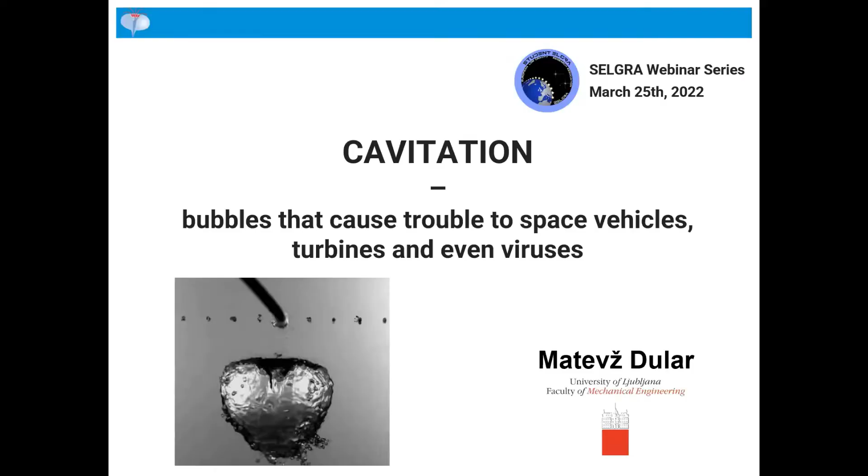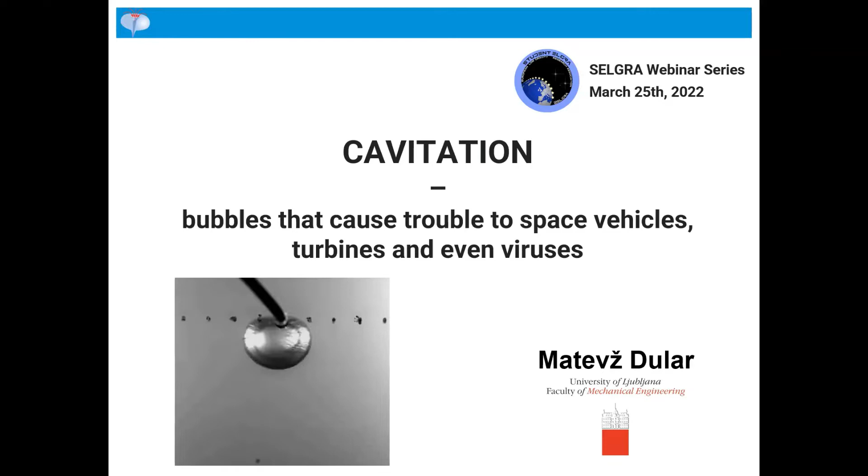Today I'll talk mostly about cavitation, and that's bubbles basically, which have some relation to space science and engineering, as you will see, but also other stuff. It won't be directly related to microgravity research, although some of the experiments that I will show were actually done in microgravity. So hopefully this will be also interesting for you.

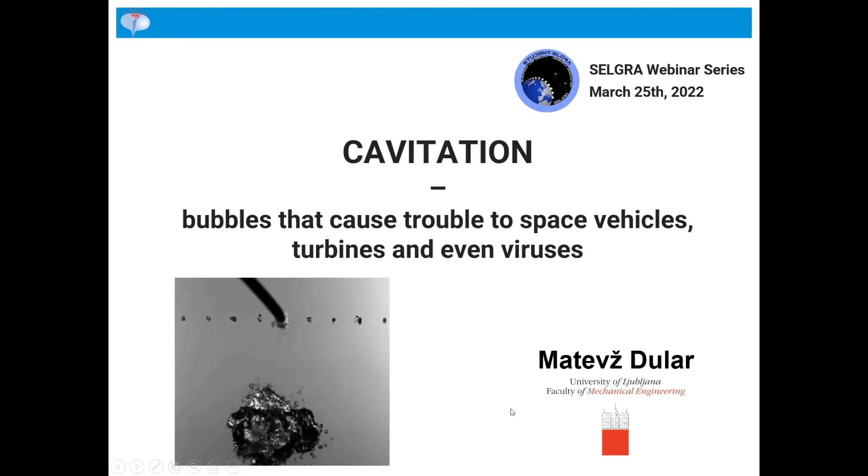So what's cavitation? Let's start with this. Cavitation is basically something very similar to boiling. Everybody knows that you can boil water if you increase its temperature. If you increase the temperature from, let's say, 20 degrees at 1 bar normal pressure, and increase this temperature to 100 degrees, the water will boil. You will get vapor, right? But there is a second way how to get to vapor, and this is if you leave the temperature the way it is.

Let's say 20 degrees, but you decrease the pressure down to about 2000 pascals. So it's a very, very low pressure. And essentially the same thing will happen.

This you can also see in these two movies. The one above, this is normal boiling at 100 degrees Celsius and normal pressure. And the one below, this is cavitation. But you can see I can hold this flask in my hand because it's not hot, it's 20 degrees, but I vacuumed air out. So you have very, very low pressure inside here, and you have bubbles boiling. It looks like boiling, but it's called cavitation.

So what's so special about cavitation? What is special is that it happens very, very quickly. This is a nice experiment, which I don't recommend doing at home. You take a bottle and you drink the beer first, and then you fill it up almost to the top with water, and after that you hit the neck of the bottle, and if you hit it hard enough, the bottle's bottom will fall off. So it doesn't seem very special to break a bottle, but once you look at this at a very high speed recording.

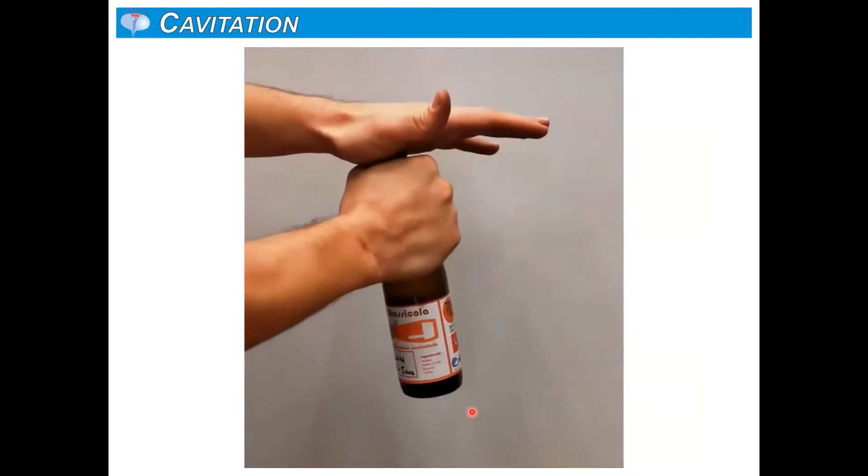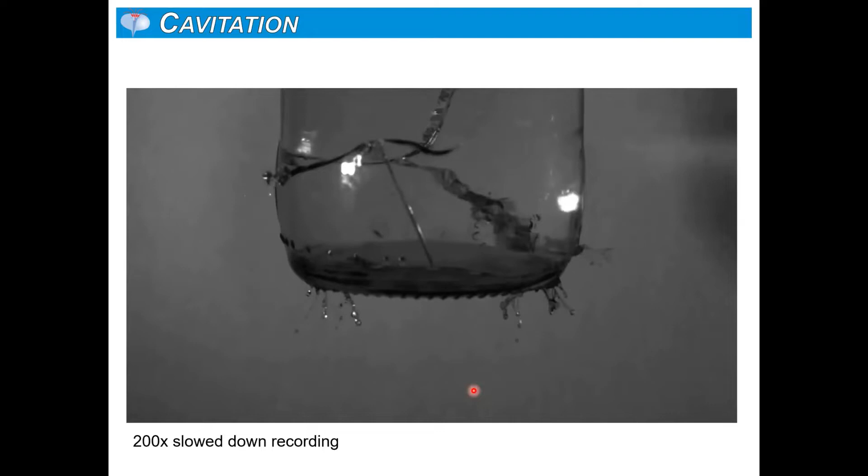This is now 200 times slowed down. The bottom of this flask, you can see bubbles appeared and they disappeared, and at that moment when they disappear, the bottle breaks. So what's interesting here is that when we hit the bottle, we create a shock wave, and as it reflects at the bottom of the bottle, you get a negative pressure. The pressure goes below this 2,300 something pascals. You get bubbles, and when the pressure recuperates to a higher pressure, the bubbles disappear, they implode, we call it. And this implosion basically is so violent that the bottle cannot stand it and it breaks. And this happens really, really fast.

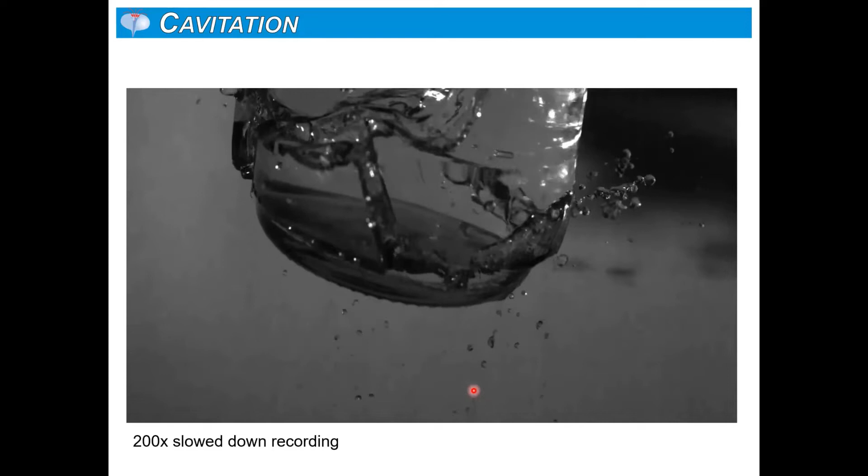So we can go even one step further to check out what is going on in more detail. These are the experiments that I've mentioned before, done in zero-G. This was done actually in Switzerland at EPFL by Outi Supponen, and she's now actually at ETH as a professor. What they wanted to do is make a very, very spherical bubble. It's very hard to make a bubble which is almost perfect. And to make it perfect, you need to take away all the disturbances, such as walls and free surfaces and so on, and one of the disturbances is also gravity. So that's why they decided to go into the airplane and fly the parabolas and do the experiments there.

So what we're looking at now is, I think that's about 300,000 frames per second. So it's about 10,000 times slowed down normal recording. And you can see how the bubble grows. It grows, I think this one is about 3 millimeters in diameter. So it's a very, very small, tiny bubble, what we're seeing here.

So the growth itself is not that exciting, I would say. But what happens after it reaches this highest size, this is when things start to get violent, let's call it. So now the bubble starts to collapse, and you can see it, it's much faster phenomenon. It goes faster, faster, faster, faster, up to a point when even 300,000 frames per second is just not enough. So at that point, we need to speed our observation even more to about 10 million frames per second.

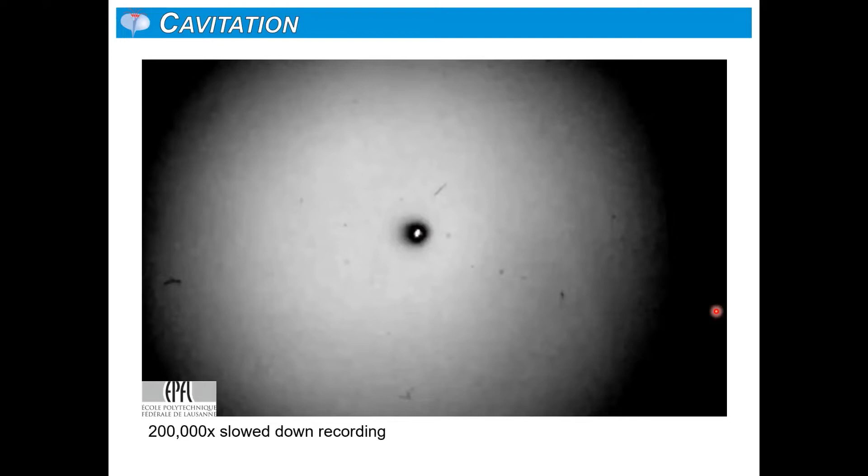So, through this light, you can calculate what was the pressure and the temperatures in there. So after that, what happens? We have a shock wave, a really beautiful spherical one, and this ring which you saw spreading around. This actually traveled at about 1,500 meters per second. So it's 5 times faster. The speed of sound in water is about 5 times faster than the speed of sound in air. So it's an enormous velocity that you can see.

And this shock wave, which travels around, this is the thing that basically destroys at the bottom that I've shown you before. So it's quite a violent phenomenon.

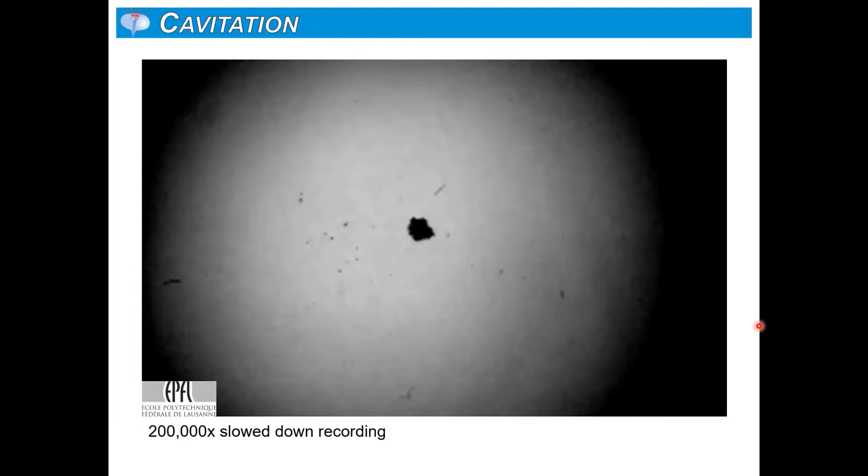So that was just one bubble. Now we're talking clouds of bubbles, many bubbles. And how do we get from one bubble, from a very clean experiment, to a dirty experiment with many bubbles which interact between each other and so on?

One way to do it is by the Bernoulli effect. The Bernoulli effect basically tells you that if you speed up the flow, locally the pressure will drop. And if the pressure drops a lot, again below this vapor pressure we call it here, water will cavitate, or any kind of liquid.

So if you want to do the experiment about the Bernoulli effect, the simplest one is just taking two sheets of paper and blowing in between them, and counterintuitively, the sheets of paper will move closer together. This is because the pressure between them gets lower. So the pressure outside basically squeezes the two sheets of paper together. That's the Bernoulli effect.

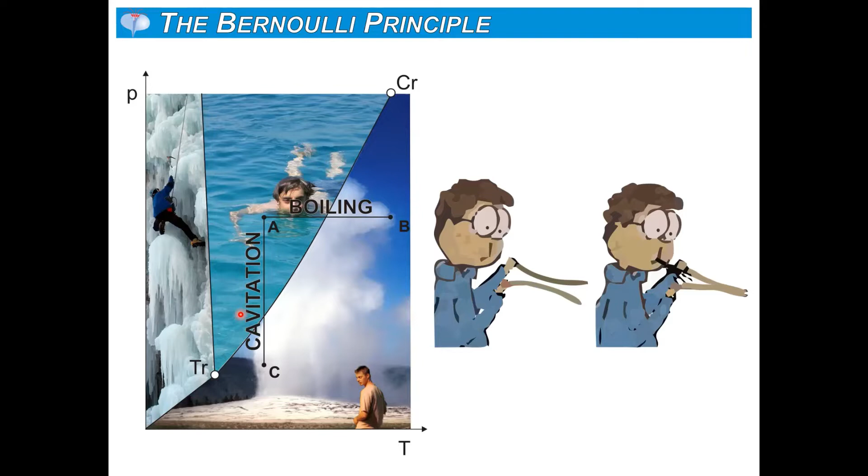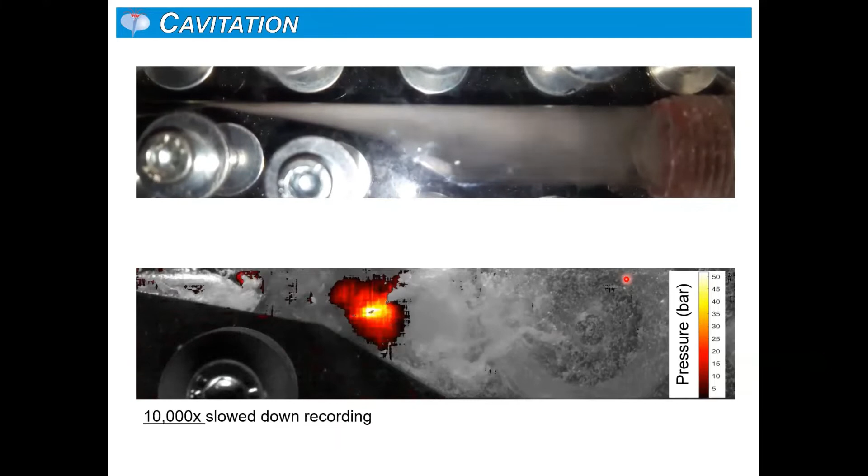And you can see, well, we call it a very rich dynamics. We have a sort of attached cavitation cloud, which then separates - this is a separate, it's many movies together. It separates, and these clouds collapse again. And when they collapse, you can see this red stuff that is also there.

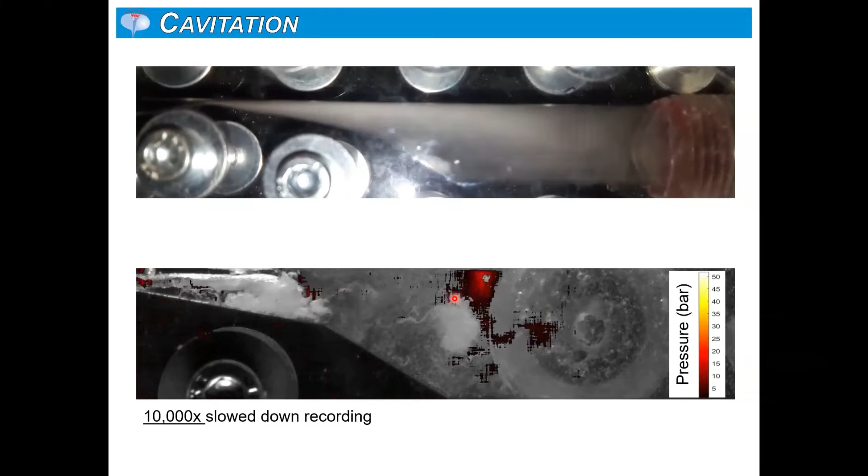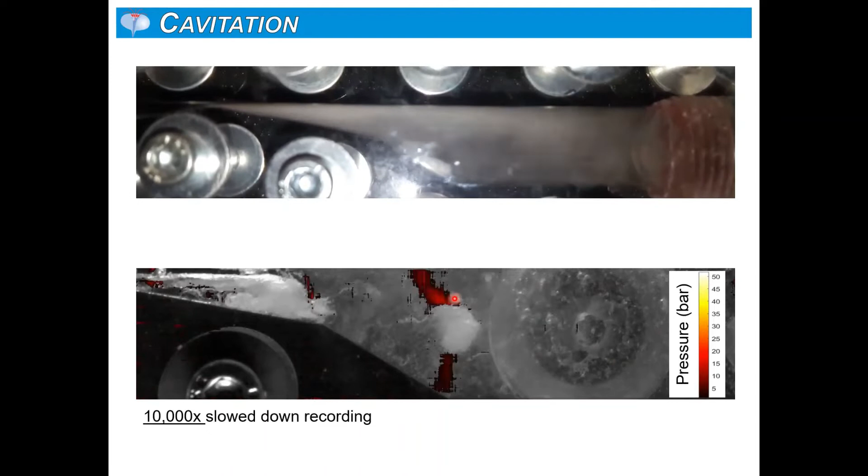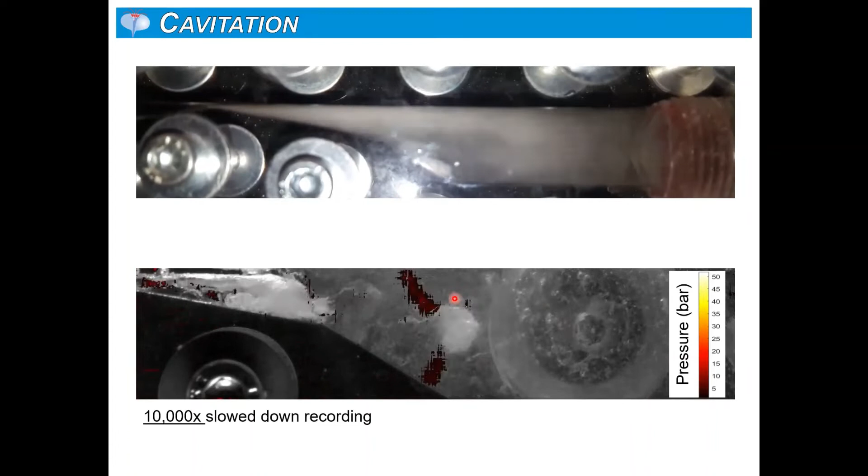These are actually the measurements of these shock waves that I was talking about before. They're not as nice as the one before, because here we're talking about clouds of bubbles, thousands of bubbles collapsing, not exactly at the same time, not exactly symmetrically, and so on. But these still have an amplitude of a couple, maybe 50 bars or so, and they can travel at the velocity of about 300 to 700 meters per second. So not quite the speed of sound in clean water, because you have so many bubbles in there, the speed of sound is a little bit slower, but it's still fast.

And how else do the bubbles look like? So, if you recall, I was talking about the Bernoulli effect before. For example, if you have a wing of an airplane, one of the effects of lift is that you have lower pressure on the upper side and higher pressure on the lower side of the plane. And this makes the plane basically fly.

And if you would put this kind of wing underwater and move it very rapidly, what would happen? Pressure on the upper side would get lower, and because of that, cavitation can appear.

Now, if you take this kind of wing and rotate it, what you get is a propeller. For example, a ship's propeller rotates, and on the side which has lower pressure, you will build up bubbles. These cavitation bubbles will appear and collapse, and they will cause all kinds of trouble.

So this would be a propeller, for example, and this one here is actually beside it - this is a water turbine. So you can have some kind of a cavitating rope of bubbles, let's call it.

These two bottom ones are maybe a little bit more exciting. This is the liquid oxygen pump of a Space Shuttle engine, one of the three main engines, and again you can see it cavitates. So this would be pumping oxygen into the rocket engine, and the conditions in there are so extreme that basically you cannot avoid cavitation.

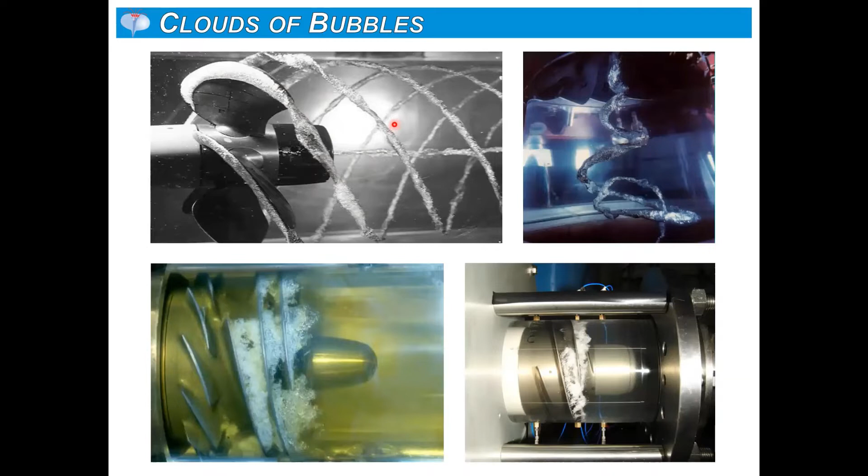Ships are a particularly funny thing, because cavitation on a ship's propeller is not that annoying. If I go back a slide, if this would be a ship's propeller, you would see that bubbles are created on the propeller, and then they flow downstream. Downstream you'll have the rudder of the ship, and on the rudder the pressure is a little bit higher, so the bubbles implode in this region and damage the ship's rudder. There were occasions where a ship would lose its rudder after just one day of operation, because there was so much erosion that it just fell off.

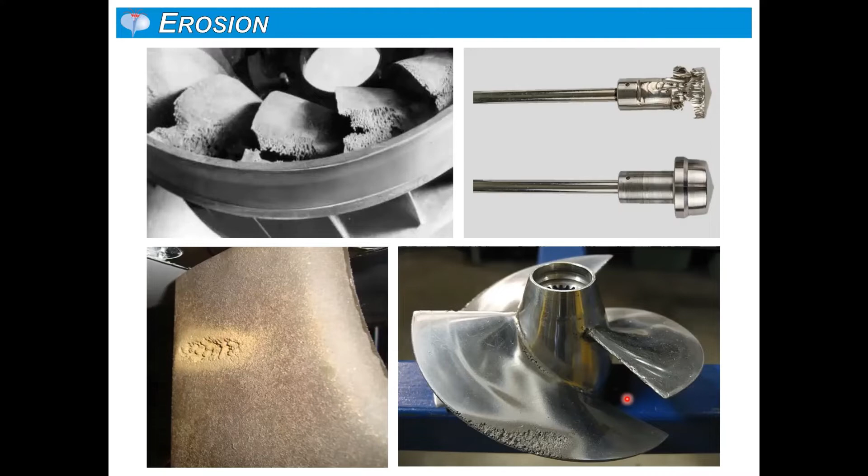And again, here's one propeller, and how it can also get damaged.

So here I have a nice example of how violent this phenomenon can be. This is actually Glen Canyon Dam - very similar to the Hoover Dam, which is maybe the more well-known one.

There's one thing that can happen here. As a precaution, if the water behind the dam would get too high, if there would be a lot of precipitation, what they would need to do is channel the water from behind the dam around it through pipes, so as not to damage the turbines beneath it or the dam. This is how this pipe looks like - the dam would be here on the right side, so it would flow into this bucket and then through these pipes and go beneath the dam.

The first time they ever used this was in the 80s, I think, of the last century. This is what happened within a couple of hours - this is inside this pipe, and what you can see is actually cavitation damage which happened within a couple of hours. These are people here, so you can imagine this is a hole about 40 meters long, just from a couple of hours, and bubbles did this. It's crazy how violent this thing can be.

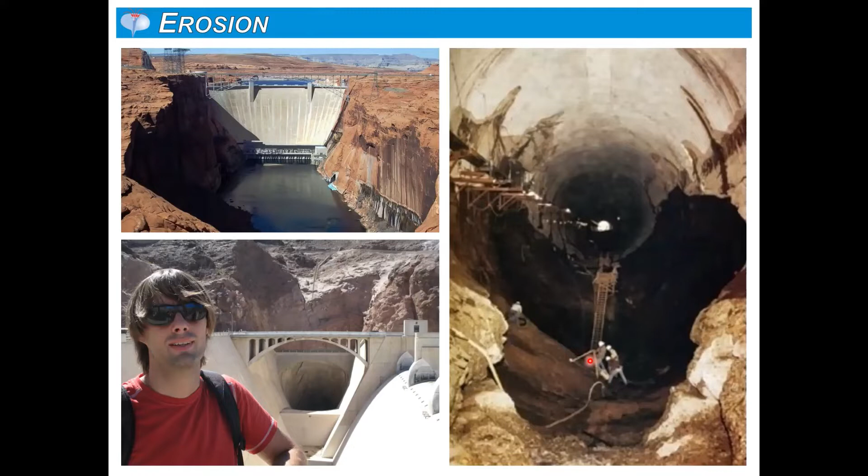Okay, so I have another example. Just to do your own experiment, I call it handy cavitation. This is actually what is going on in your fingers. I can try it if I do this.

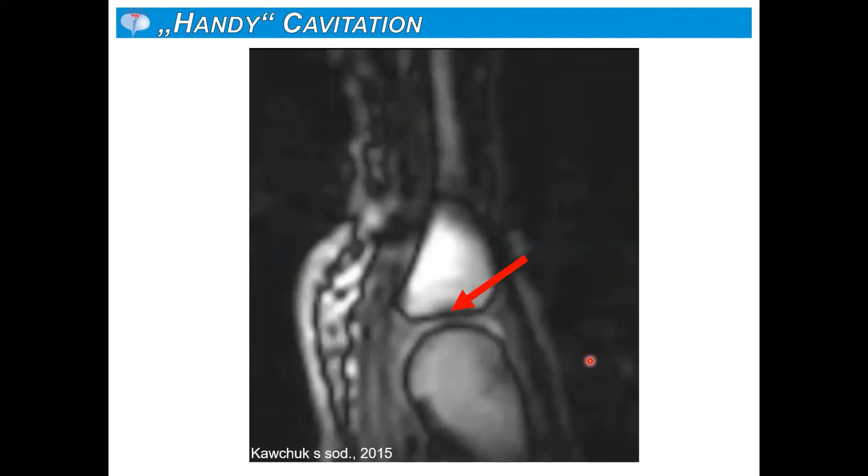Almost nobody likes this sound, right? Popping sound. Actually, what is going on, this is an MRI scan of your hand. When you pull the finger, you will see a white spot here, and it disappears. What you do when you pull the finger, you increase the volume in your joint, the pressure drops, a bubble is created, and then it collapses, and this pop that you hear is actually a cavitation bubble which imploded inside your joint.

Right? So don't do that. It's not a good thing to do, especially when you saw what else can these bubbles do.

I had one lecture once when the whole audience did this at the same time. It was really nasty to hear.

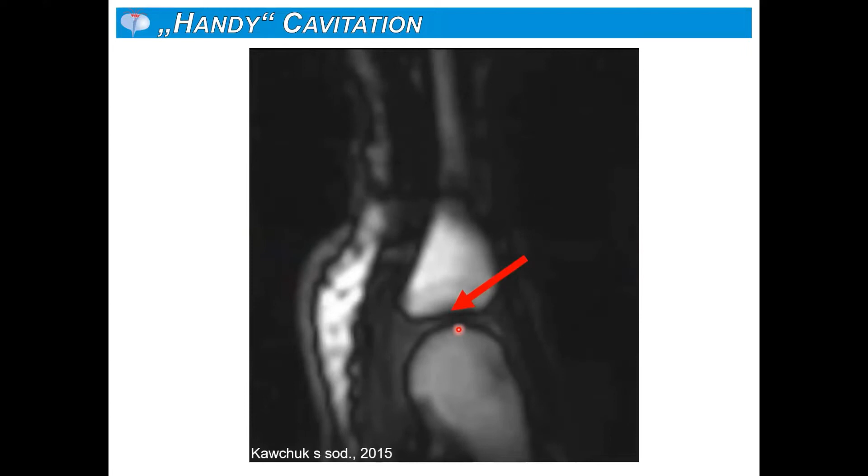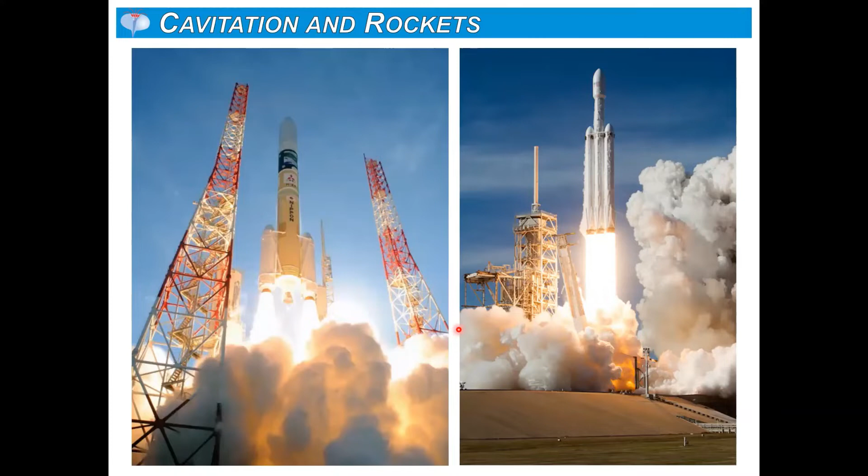Okay, let's move to rockets, because I figured that if you're into microgravity research, you like rockets. So let's talk, how are bubbles important for rockets? This is the field that I was working on for about 7 years. I'm showing here two rockets: one is the Japanese H2 rocket, and the second one is the new SpaceX Falcon Heavy rocket, and they both have issues with bubbles. I'll try to explain it using these two examples.

So first of all, how does the rocket engine work, right? That's the first thing we have to clear up. I've just copied this from a really nice book, Thing Explainer, which explains everything really simply. We'll have to go into a little bit more detail because it just says lots of fire comes out here. But how do you get to the fire? That's the tricky part, right? What do you need to do to get to the fire which pushes your rocket to space?

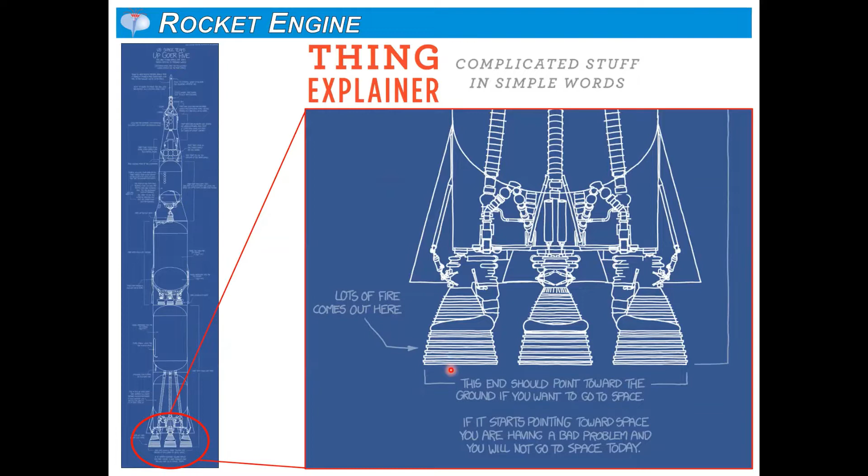So it's actually simple, let's call it. This would be the Vulcain engine, the first generation, which was used in the Ariane 5 rocket. What do you do? You need two things: you need the fuel, which in the case of the Ariane rocket is liquid hydrogen. And because there's no air in space, you need to also bring some oxygen with you. So what you do, you mix these two things in the chamber, you light them up, and you get fire, and the rocket goes up.

The problem is how to get these two fuels, these two liquids, into the rocket engine chamber. What you do is you use pumps. So you have a pump here, this would be a turbopump, and we call it turbopump because what happens is you push the liquid into the chamber, both liquids ignite, and after they ignite, some of the exhaust created at ignition is let away from the main exhaust and passes a turbine. That's why it's called the turbopump, and this turbine drives the pump.

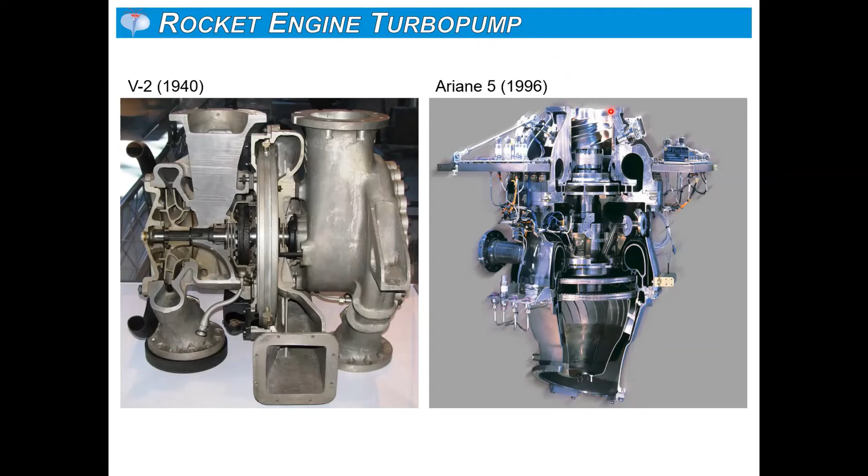The trick here is that this upper part is used just to increase the pressure a little bit so that this pump here does not cavitate. Because if this pump would cavitate, if bubbles would appear in here, it would not bring enough fuel into the chamber of the engine, and the rocket won't fly. So what you do is basically sacrifice this first part of the pump, the inducer, and you always have bubbles in here, which is what I've shown you before. You just let it be - you cannot get rid of it. It's designed so it can sustain cavitation for a couple of minutes. After 3, 4, 5 minutes, this inducer is damaged beyond any repair, but this is just enough time to pump the whole tank of the rocket so it can fly into space. So it's really an optimum design.

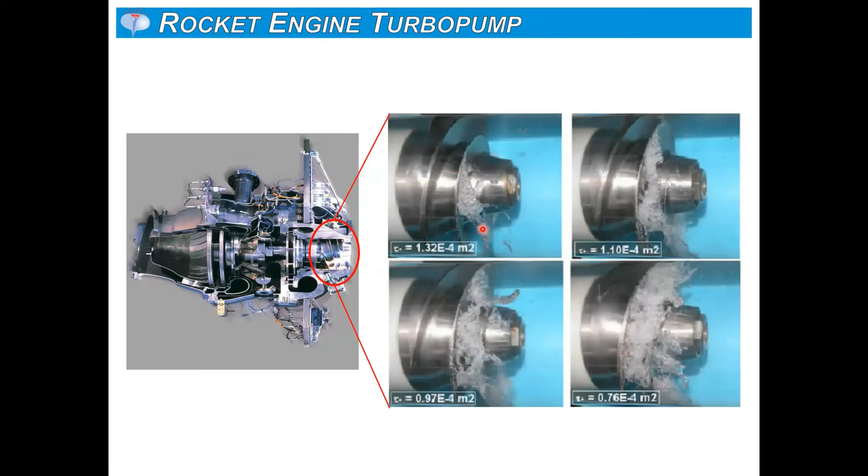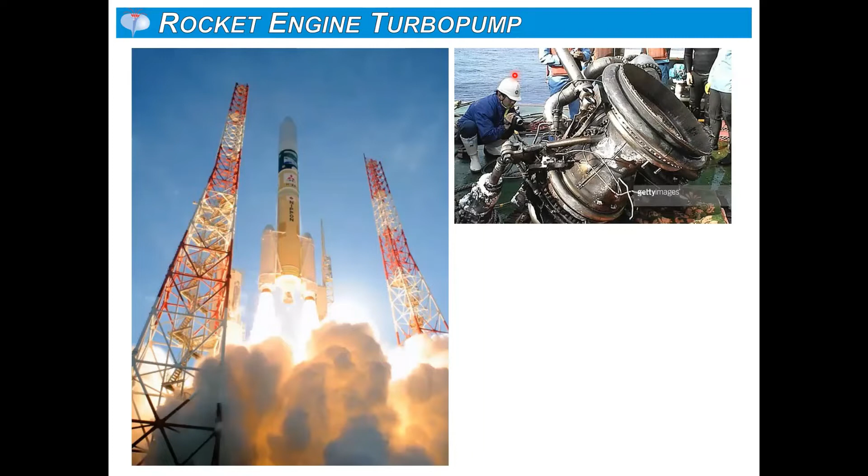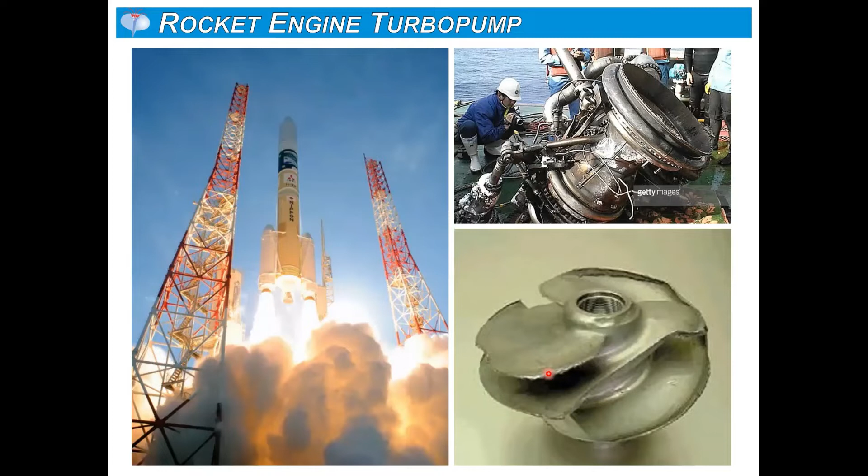You can see the inducer of this turbopump is damaged - damaged so much within a couple of minutes that it didn't pump enough fuel into the rocket engine chamber. Because there was not enough fuel inside, there was not enough exhaust. Because there was not enough exhaust, the turbine could not drive the pump, so it stops. There was even less fuel coming in, and basically the rocket just fell to the ground. So it's a very, very important lesson that people learned at that time.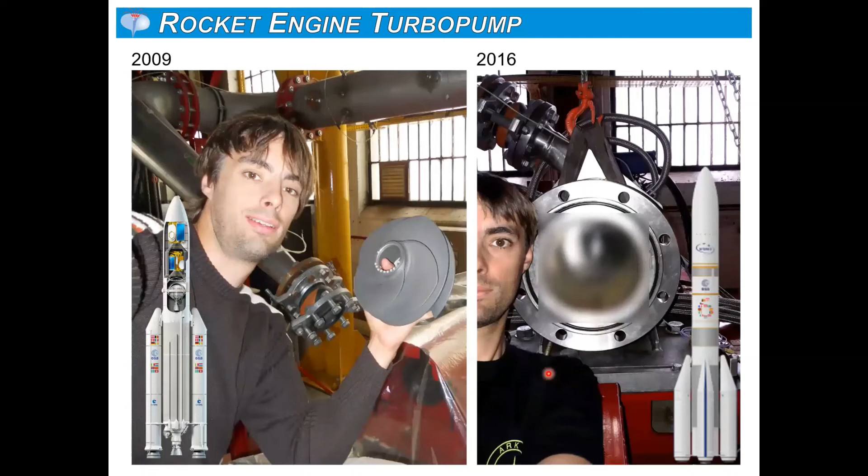Okay, this is me actually working on the two inducers for the Ariane 5 and Ariane 6 rockets, both in Lille. This is the inducer that was used in Ariane 5, and in Ariane 6 they have a new inducer, but they still don't want me to show the design, so I blurred it out. It's very similar to the one I'm holding in the other picture. It's made out of titanium alloy for this case, and for the liquid oxygen, it's made out of aluminum usually. At this kind of revolutions, you need to be careful about the weight, so usually you use titanium or aluminum.

Okay, so if we go now a little bit to the future, to SpaceX and stuff, what did they do? They've done a genius trick, right? They're landing their rocket with rocket engines. This is the launch when they put a car inside, if you remember. I don't want to go into discussion if that was smart or not, but they launched a car towards Mars. What happened then is they land these three boosters - the two side ones and the middle one landed with the rocket engine. That's kind of crazy that they're able to do that, right?

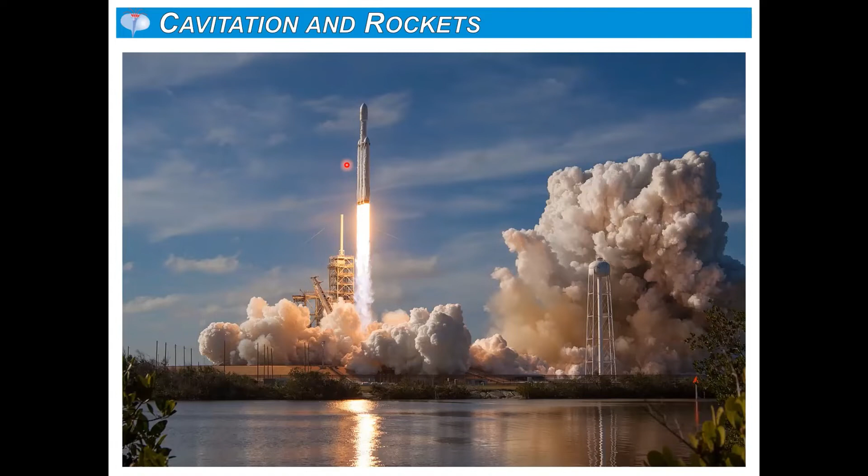But the funny thing is, making it stable to land like this, that's not... I mean it's hard, but it's not impossibly hard. Even at our university, I learned this in maybe 6th semester of the study, how to program stuff like this, how to balance something like this. The hard part is getting the engines to light up again, right? So you use them to go to space, then you shut them off, and after that you light them up again and you land with them. That's the hard part - lighting these engines up, because you have to close this loop, as I've told you, within one revolution of the inducer, and that's very, very harsh to do.

Okay, so this is just again the same thing that I've explained to you, right? You fly to space, and then these two boosters fall down to ground, but just before they land, they light up the engines again and they land safely. The third one lands at sea, actually, on the sea platform, I'm sure you know about that. Now that's one genius trick they do. They have some problems in it. The other thing they're doing, that nobody really realizes, is they have cavitation in there. There's a big problem with cavitation.

What they're doing is they're subcooling liquid oxygen - no, they're not using hydrogen, they're using kerosene in this case - but they're subcooling it. Basically, if liquid oxygen liquidizes at 180 degrees below zero, they go to 190 degrees below zero or so. With this, liquid oxygen is a little bit denser, which means the tank can be a little bit smaller, and they save weight with this. So that's one trick they do.

But the second trick they do is basically, if you have a lower temperature, you move this point a little bit to the left, which means cavitation will occur a little bit later, right? So you can drive your pumps a little bit faster, and because of that they can be a little bit smaller, and again you're saving weight. They're really pushing it at this point, because this is also why they're fueling up the rockets just a couple of minutes before launch - once they're fueled, the liquid starts to heat up and expand, and it's basically the same as if there's an astronaut up there sitting on a pressure cooker, hoping it would not explode before they launch it. So they're really pushing the envelope, but this is why it's very efficient and very cheap to go to space this way.

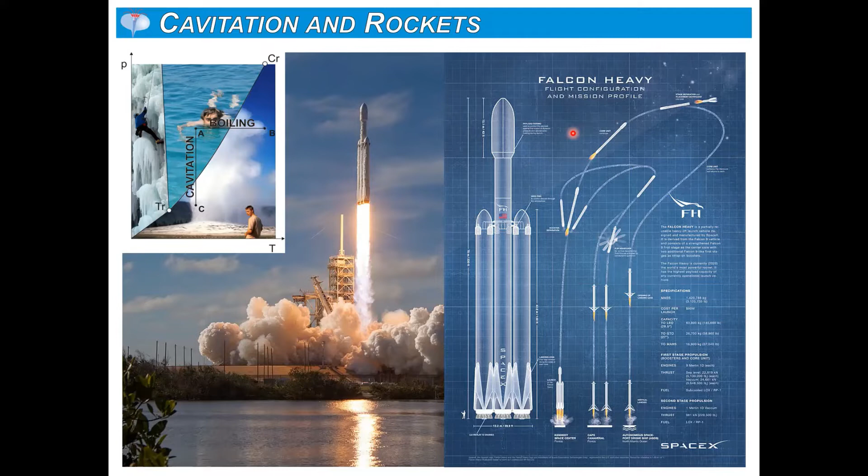But as I said, they still have problems, right? And they being Americans, they deal with it in a very interesting way - they say it's a small hiccup. Because the time they launched the car into space, these two rockets landed perfectly, but the third one crashed. And it crashed because, they said, they failed to light 2 of the 3 engines during the landing burn.

So it uses 3 engines to land, and 2 of those could not be started. And they could not be started because this startup of the rocket engine is so incredibly hard to do, because it has to start rotating at such an enormous acceleration.

I was once in France at this kind of test when they tried to see if the pump will do this fast startup. It was a model test, not the real one. This is a test rig which was about 10 meters long. When they started it, it jumped about 1 meter into the air. And then they say, okay, successful, let's move on. It's so incredibly intense, this fast startup.

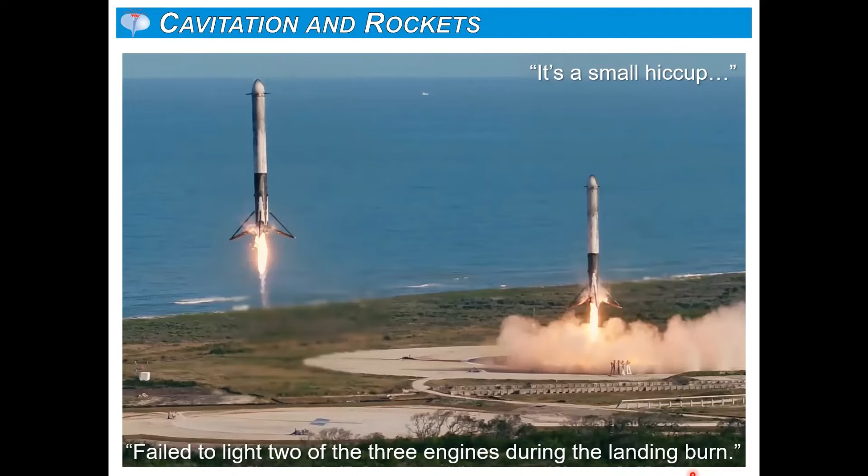The same thing is kind of interesting, is what is going on right now with the new rocket that they're using, the Starship. I've put this nice image here. This is, I think, Starship number 9, which exploded, and this is Starship number 10, which is anxiously waiting its turn. Starship 10 actually was then successful for the first time.

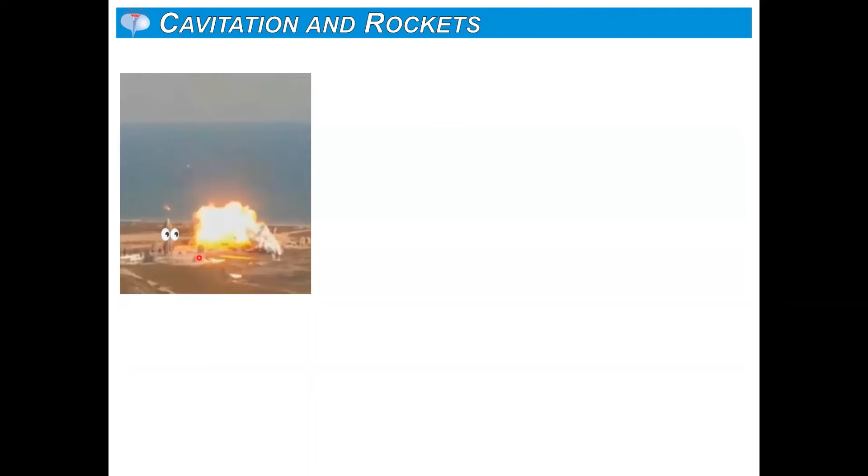I'm showing you here now one movie. That's one thing that the people from USA would say at every explosion. They would say we have lots of good data. That's true, but I'm sure they would be much happier if it would work.

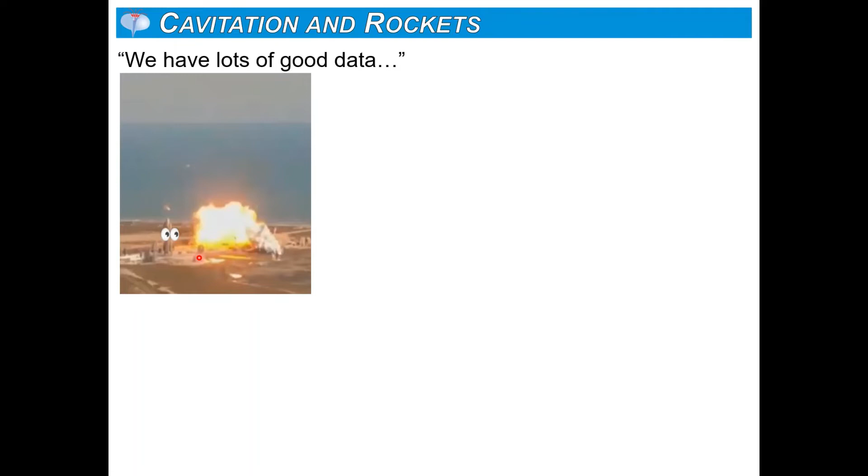I'm going to show you how much they need to save the fuel, because I think people don't realize how late the engines are actually started during the flight. So I'm showing you one movie which you maybe have not seen before.

What you're going to see here is the Starship 10 falling down to Earth at free fall. It's actually 0G there. And just before it lands, it lights up the engines. So that's a couple of 100 meters high.

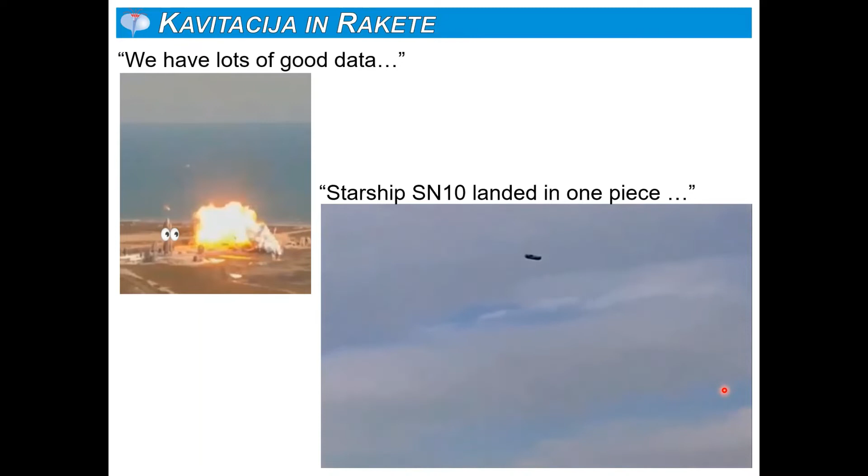I think people don't realize how late into the flight they actually start this sequence of safe landing, let's call it. This is the most incredible thing. And they're confident that people will ride this rocket to the ground this way. So you can imagine how much engineering goes into this and how intense this kind of procedure is. So it's not easy.

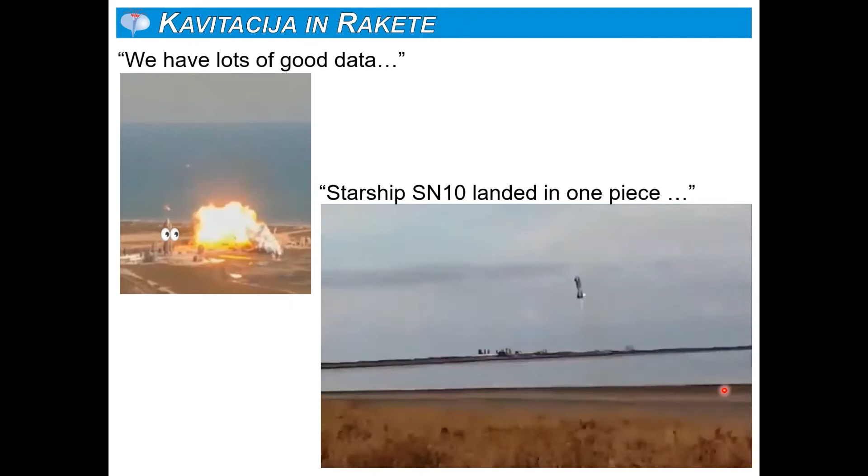And this was the first one that actually worked, I think. Starship number 10. Okay, let's wait for it to land.

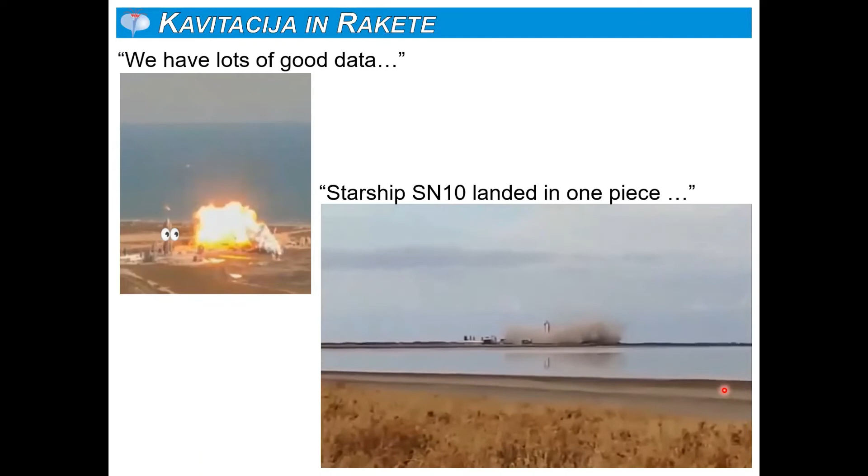So how does Europe respond to this? How does Europe respond to these reusable rocket launches? They really lowered the price of payload going into space. So Europe made a different bet. One of the bets is they still use rockets which are not reusable.

Ariane 6 is not reusable, but both Ariane 6 and Vega have a feature which no other rocket has, and this is the Vinci engine, which is up here for the Ariane 6 in the second stage, or the Vinci is here for a Vega. And the Vinci motor is actually capable of reignition.

This is where bubbles again come into place, because what they want to do is launch a rocket to put satellites into orbit and then reignite the Vinci engine and go into a different orbit and deliver satellites into that orbit, and then reignite the Vinci engine again to put satellites in a third orbit. This is something that no other space launcher can do at this present time. And this is the bet of Arianespace, that this will basically sink the price for them and make it more convenient for people to use it for delivery of satellites.

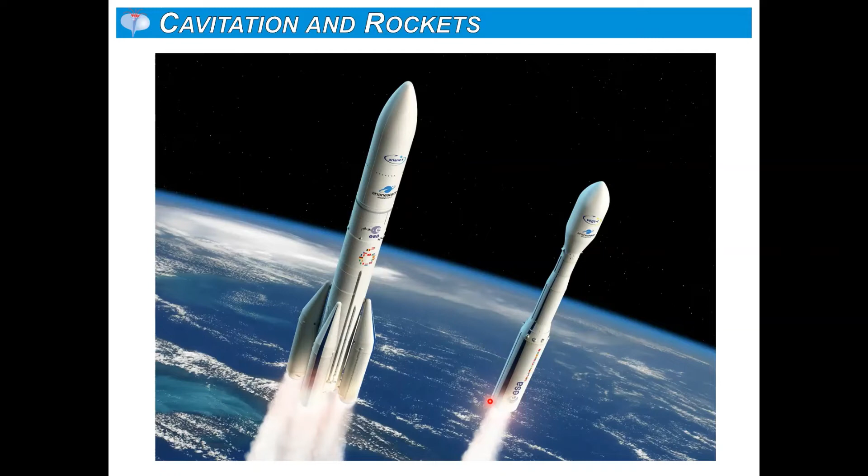Okay, so I will stop with cavitation in space now, and I will go to a little bit different topic before I conclude, and I will go to cavitation in nature. This is a little bit towards, yeah, we can use cavitation.

So these two guys, this is the shrimps. This one is called mantis shrimp, and this is the pistol shrimp. They were actually using cavitation long before rockets, and they use it, as you can see here with the high-speed movie.

The mantis shrimp uses its hand to swing against a shell, and it swings so fast that you can see bubbles appear. These bubbles, when they implode, crack the shell. They actually found out that the hit from the hand is much weaker than the implosion of the bubbles.

So this guy is using cavitation to hunt for food. Similarly, the pistol shrimp shoots a jet of water which cavitates towards fish. These bubbles, when they implode near the fish, would kill it or at least knock it out so the shrimp can eat it. So nature found a way to use cavitation.

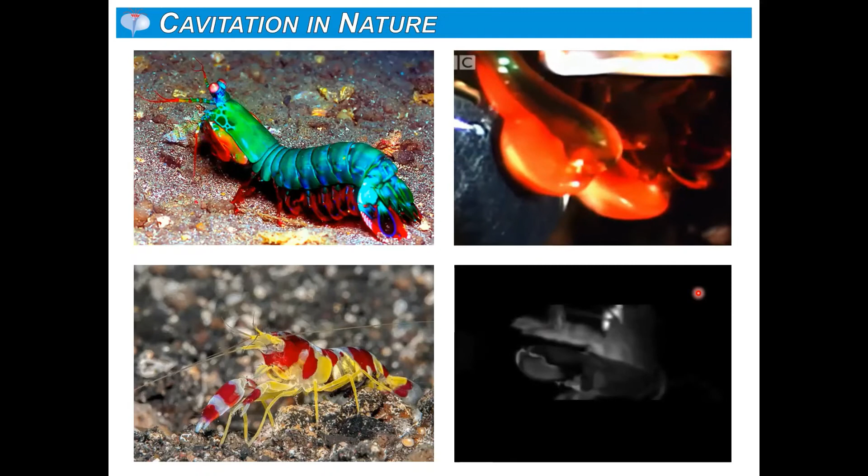If nature can do it, can we do it? Can we use all this aggressiveness of bubbles, which damage our turbines, pumps, or rockets, to our advantage and do something useful with it? This is the thing I'm working on right now.

So what we do is, this is just one of the devices, a very simple device. This is the one I've shown you before with this small constriction. We create bubbles, and then we put into these reservoirs contaminated water.

For example, we can contaminate it with different kinds of pharmaceuticals, which are really bad for the environment, such as the outflow from hospitals. There's a lot of pharmaceuticals inside, and you want to get rid of them even before they reach the water treatment station. We found out that by cavitating this water, we can destroy different kinds of dangerous pharmaceuticals.

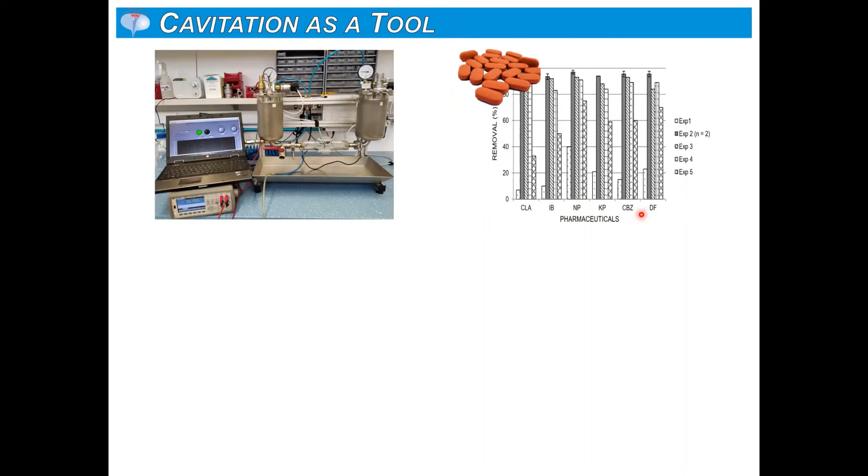We also found out that we can kill different types of bacteria, like Legionella. You know that especially in hospitals or hotels, Legionella is a big issue. But if we cavitate the water, we can destroy Legionella very efficiently and at a very small cost.

And it's a similar thing with viruses. We can destroy viruses, even coronavirus. We work with coronavirus because there is a slight chance that if somebody who is sick went to the toilet and flushed down the drain, water infected by coronavirus could re-enter the environment and infect other people. But if you cavitate it, you can really efficiently destroy this type of virus.

So it works. Sometimes we still don't know why it works, but it works definitely. And we are doing a lot of very basic research on how the bubbles interact with bacteria, how they kill it, and so on.

I'm showing you here one movie, which is basically a one-on-one fight between the bubble and bacteria. I can show you both of them. On the left one, there's an experimental one. There was a bubble here, and these rods you see here are E. coli bacteria. When they get permanently damaged, we call them, they light up. So these brighter ones actually died, and the ones further away, nothing happened to them.

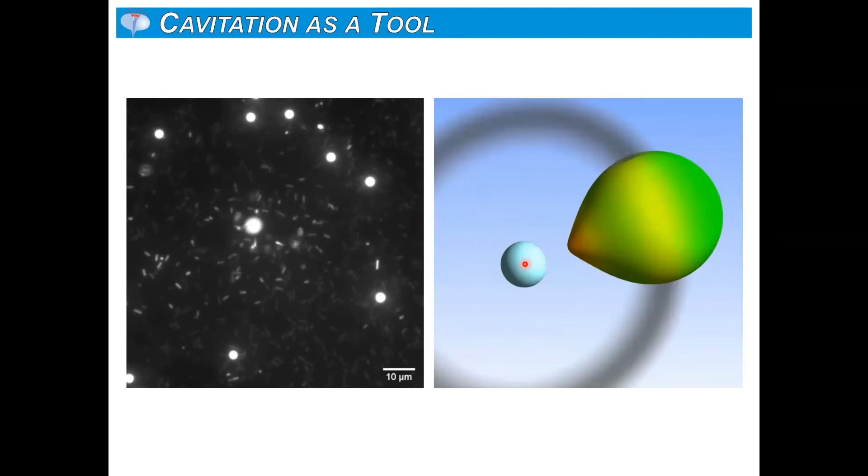Then we use this data to optimize our devices, which we implement into some kind of water system. So we have, for example, different kinds of patents already for treating bacteria, this one for viruses, this one for even dirtier water, doesn't matter.

And we use these kinds of devices to first purify water. So we have some kind of contaminated water, and then we cavitate it by bubbles, and we get pure water out. And what else we can do is, if there's sludge, very dirty water...

You can basically dry it out and burn it, because you cannot use that kind of sludge and manure for fertilization of fields, since there are just too many contaminants inside, too many heavy metals. But by using bubbles, you can also remove those, so you could use it for fertilization. It's kind of nice.

And the third nice thing is, by doing this, bacteria like to eat this kind of dirty water more, and it produces more biogas. So you can also produce energy with it, and you can close the cycle, producing more energy out than you have to put in. So you produce more biogas later on, while the energy input for creating bubbles is relatively small. It's kind of nice.

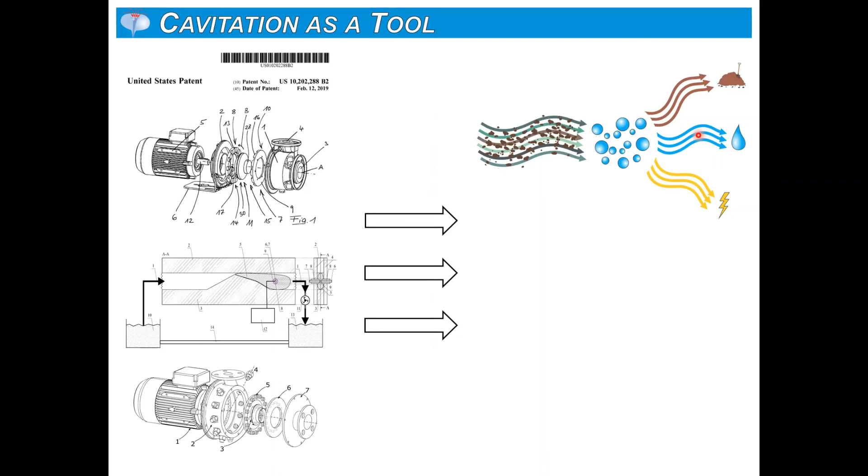And that's not all. We can also treat soil directly, for example wetlands, which have a lot of heavy metals there. We can do that with bubbles. We can penetrate cells and put medicines into them by creating a bubble, because cells usually don't like to accept medicine. But by creating a bubble, which punctures a very small hole into the cell, you can put in the medicine very efficiently. You can enhance chemical reactions, and of course do various stuff in engineering.

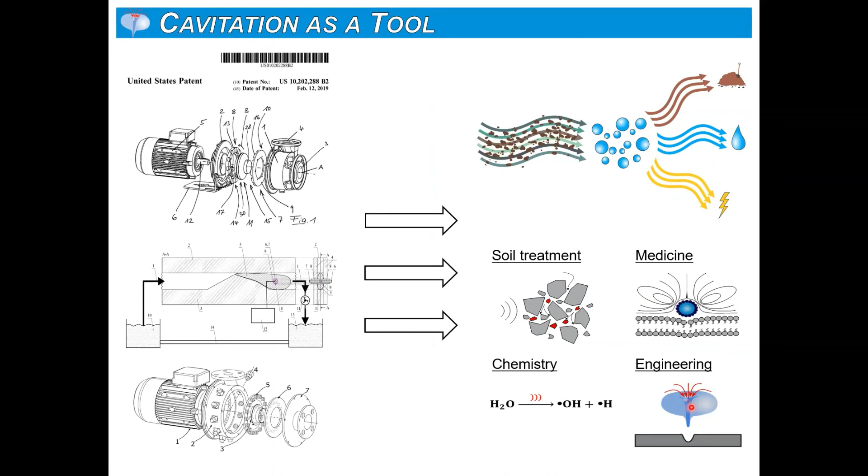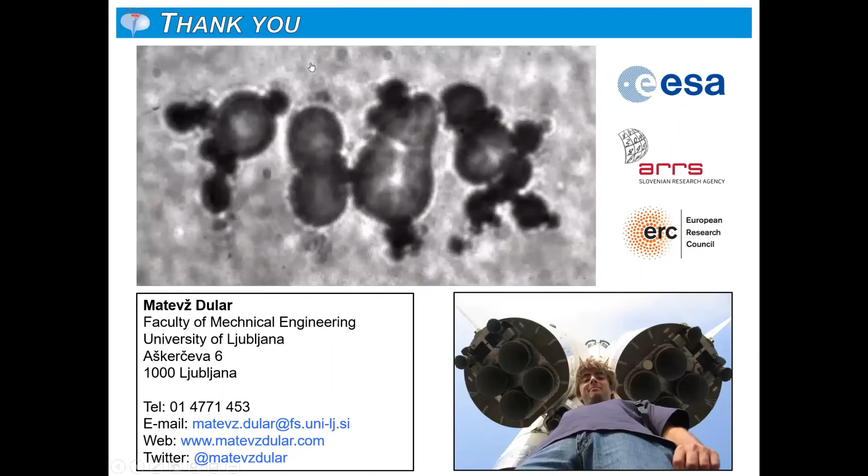Thank you very much, it was an awesome presentation. I actually have a few questions. I am going to share my screen because I put them into a PowerPoint.

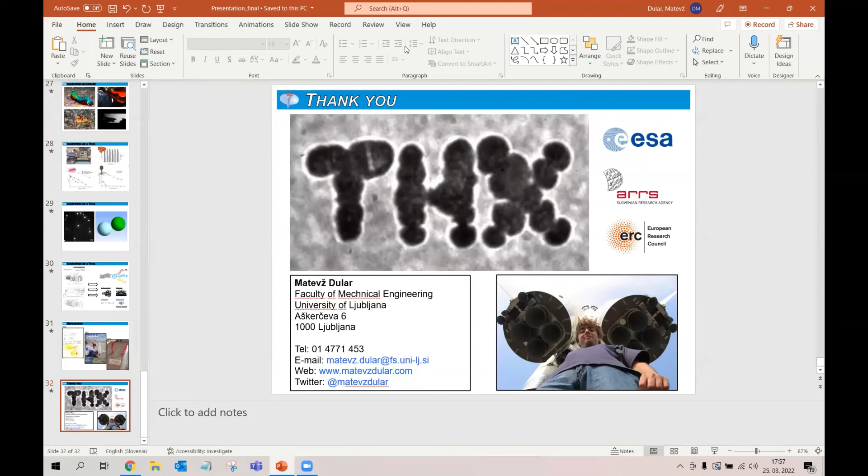Is that okay with you, or do you prefer to read them? Yeah. No, I can stop sharing and we can discuss. Okay, just... Sorry, I'm having trouble, or I can read them. It's okay. Okay, so let me share my screen here.

Oops, okay, so it starts here. Yeah, not the glacier, it's frozen. So I'm not climbing the glacier, I'm climbing a frozen waterfall. This is something I was really into for a long time, but lately I don't climb that much anymore, unfortunately. But it's a nice sport. Yeah, it's me on all three pictures. Yeah.

Will it be harder to land on Mars than on Earth due to less gravity, in the Starship case? I'm not sure, I mean, it's probably Mars has lower gravity, right? So it should be easier to land on Mars in terms of fuel consumption, I would say. I'm really not an expert here, so somebody else would have to answer this question.

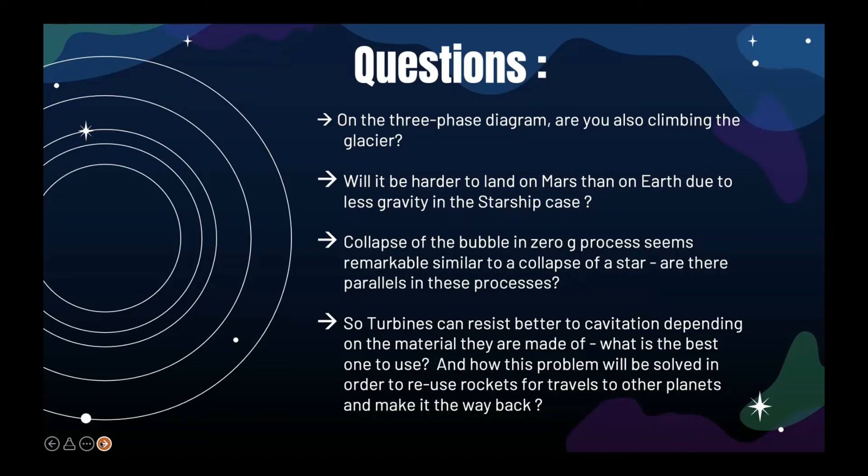You could use a less aggressive type of pumping, but to do that you would need to make your fuel reservoir a little bit stronger so it can sustain more pressure inside. But if you have more pressure inside, you need a stronger tank, which brings more weight. If you have more weight, you need more fuel. So you're basically in a cycle impossible to get out of - this is why we're doing this on such a sharp edge, whether it's possible or not.

The role of Earth's magnetic field to induce cavitation in rockets in outer space - is this issue considered? How much? I have no idea. I'm thinking that if you're rotating at 1,000 revolutions per second, then the magnetic field is not that important. It's similar to the Coriolis force, right? It's not important if you're looking at your bathtub, but if you're looking at something really big, such as a hurricane, then it is important. But I don't think the magnetic field, especially Earth's magnetic field, should influence it in this way, at least not in a measurable way.

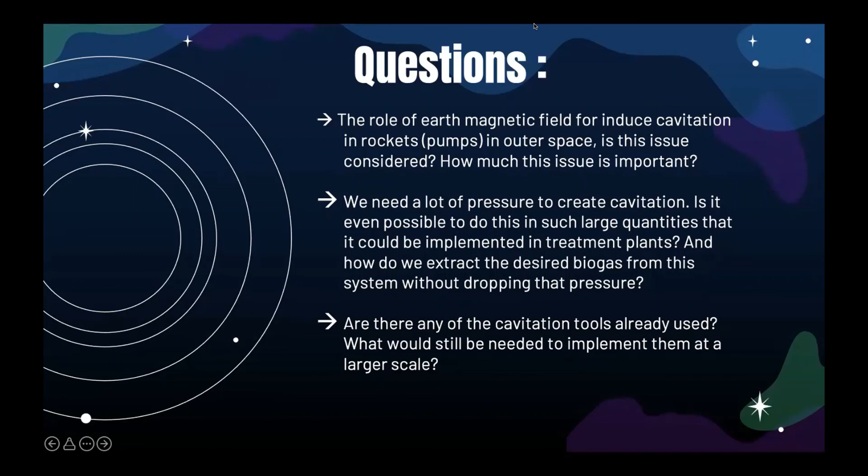Last question: is erosion caused by cavitation in devices that use it? Yeah, there is a problem with cavitation also in those devices, but it's not too bad. I mean, we've had devices work 24 hours per day for months, and we've seen damage, but it was not so bad.

They still don't work at the rates rocket inducers work at, so it's not so bad. We can work for months or years even without any problems. And then after that, maybe we should replace a part or so, but that's not an impossibly high price to pay. So right now, we don't see it as a problem.